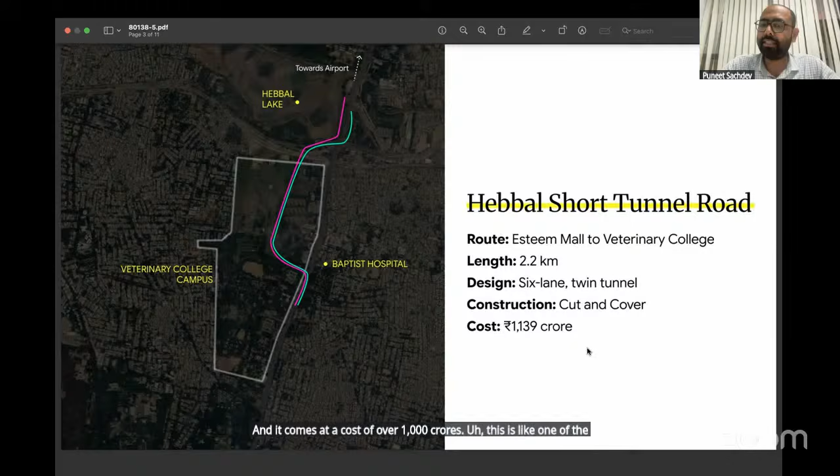And it comes at a cost of over 1,000 crores. This is like one of the most expensive projects in Bangalore. 1,000 crores for just 2.2 kilometers. Yeah. So speaking of the ecology and the green and blue spaces, the GKVK campus, Hebbal Lake, Veterinary College campus, and this IISc campus, they all form this large blue and green land area in North Bangalore.

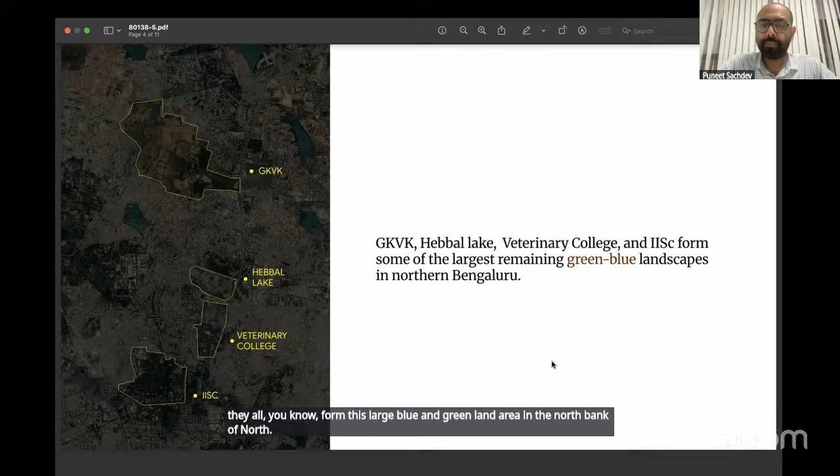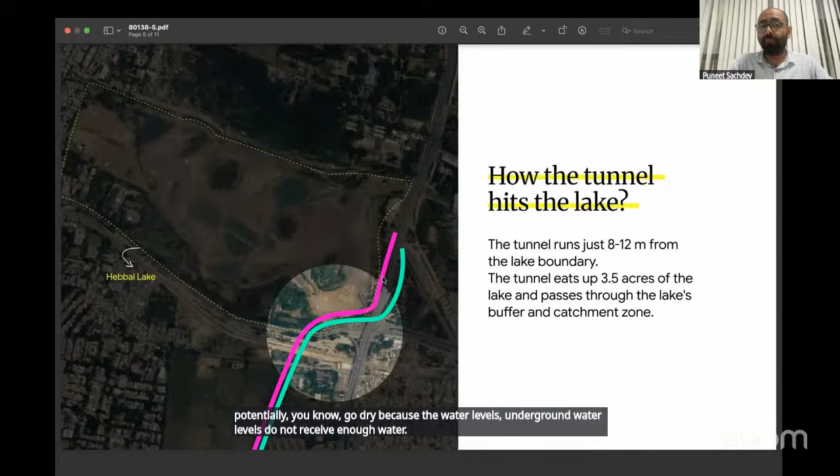So what will happen here is when there is a road, or like a big structure in between, it is going to obstruct between these two regions, which is the lake and this side. So this area could potentially go dry because the underground water levels do not receive enough water. And that would cause flooding on the other sides. Again, all these things will be addressed a little more in detail, just giving you a brief overview here.

Right. And this is something very concerning and disturbing. There is already a red line planned on the same stretch, which will go towards the airport, running across from Mekhri Circle, Hebbal towards the airport. But that has been deprioritized for this particular project. There was also a metro station planned right at the veterinary college campus junction, which has now been dropped to accommodate the exit of this

particular tunnel road. So, when we do a comparison of roads and metro, there's just no comparison. What a metro can do is, as it's mentioned, it can carry lakhs of people every day. But with the tunnel road, it's just going to be a few thousand cars, not people.

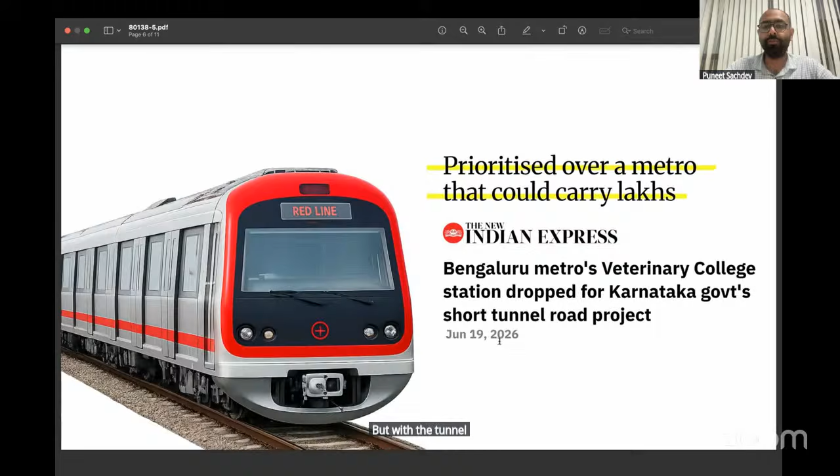This is another interesting fact from their own report. Like it's mentioned here, traffic engineers grade roads from A to F, right? Again, Dr. Ashish Verma is here. He'll be giving much more details about what all of this means. But level A is very free flowing, and F is pretty much like a parking lot.

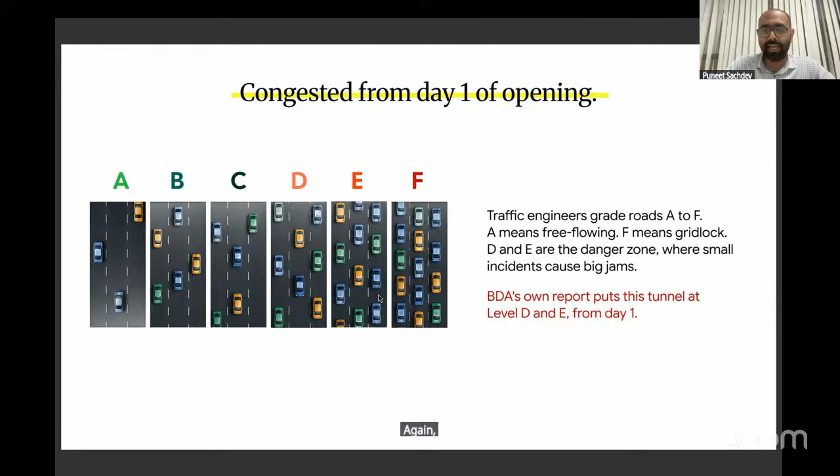And there are many more red flags along with that. The BMLTA review was bypassed. Rishi will be talking much more in detail about the BMLTA. The veterinary college also objected to having a surface level road. So originally it was planned that this road would not be a tunnel road, but it would cut across the veterinary college campus at surface.

So the veterinary college objected, saying that we will not allow a surface level road, but we are okay with the underground road. But what they are doing is still damaging the surface. So again, this is very contradictory.

They raised these objections, but no heed was paid to that. The finance department of Karnataka also raised this concern that this is 10 times more expensive than a normal surface road project. So again, why are they doing this while it is not really a tunnel? What is the need to spend so much money just to dig land and again build walls and build the road? That is something that we need to really think and introspect.

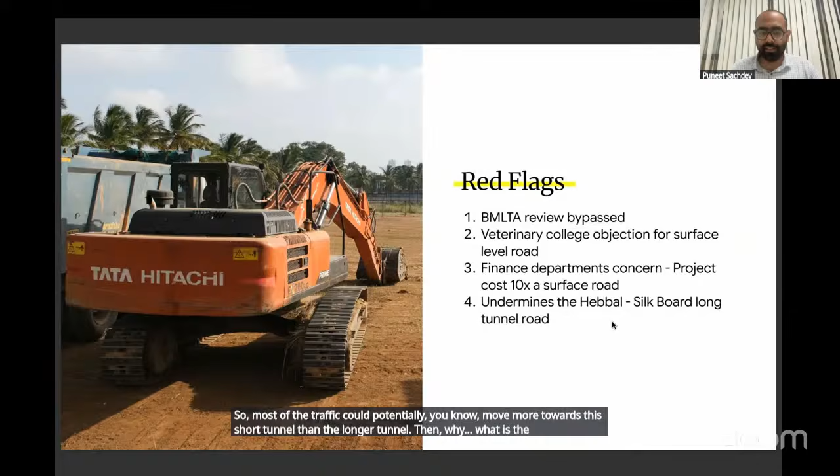And like we discussed, the whole metro and the long tunnel road also. So there is a long tunnel from Hebbal to Silk Board Junction. There is a lot of conflict between these two as well. So the long tunnel is going to be a toll road, while the short tunnel is going to be a free road. So most of the traffic could potentially move more towards this short tunnel than the longer tunnel. Then what is the need of this long tunnel? We'll be going more in detail about all these things.

And then there has been quite a lot of resistance from citizens, from organizations, from anyone who's concerned about this. And there have been some PILs which have been filed in the court. So in the last hearing that we were present, the court directed the government to produce the ecological assessment reports. We were primarily contesting that there are a lot of trees that are going to get cut inside the campus. 3.5 acres of lake is going to be taken for this road. And there has been no real ecological assessment done. The kind of damage that it can do to the whole ecology of that area is not present. So the court acknowledged that fact and they directed the government to produce these reports.

That was by the 20th of August. And on the 24th of August, that is this week, there was supposed to be a hearing which got adjourned. And now the next hearing is on 3rd September, which is going to be an online hearing. So again, why this delay, what is happening, we really don't know. While all this is happening, the ground reality is that the construction is moving at full speed.

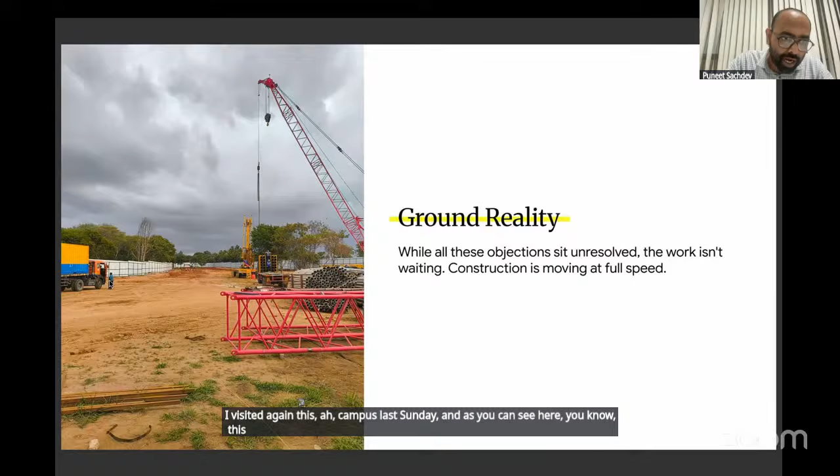I visited this campus again last Sunday, and as you can see here, this entire thing is marked for the road. So this is the boundary for the road. There are huge containers that have come here, which have got something called polymer. So polymer is something that they're going to add after they dig so that the land doesn't collapse. So huge equipment, a lot of investment already there.

I spoke to a couple of engineers there, and they said that they target to finish this casing in 8 months. There is a huge shed which has been set up for the workers who are here to build all of this. So around 2000 workers are going to be living there. And all this has already started while there is so much objection still going on, which is unresolved.

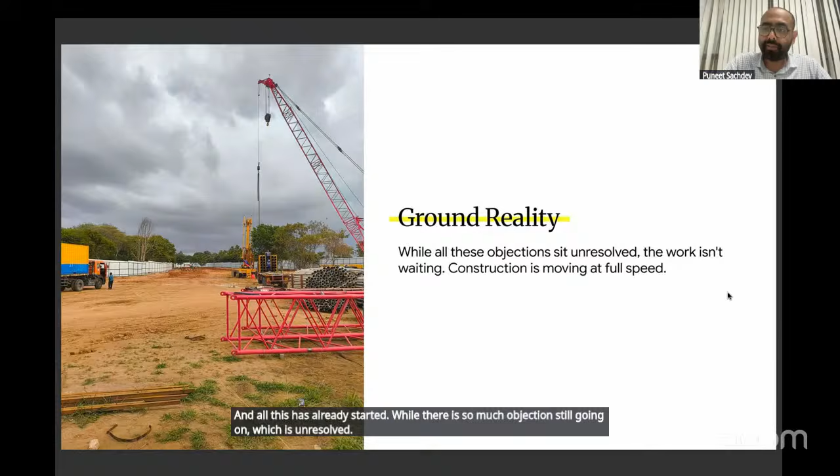And like Vandana also rightly mentioned when we started, it is not just about this particular project, but it is the pattern where such huge projects are being sanctioned without necessary assessments, without consultations from experts, from citizens, nothing. It is just brazen audacity where these different organizations are just going ahead and spending so much of our money on these projects which are not going to help too much. I would not even say too much, they're not going to help at all. So that's all.

I think I will allow Dr. Ashish to go in detail about the specifics and how it will impact the traffic or how it is not going to impact the congestion. So over to you, Dr. Ashish.

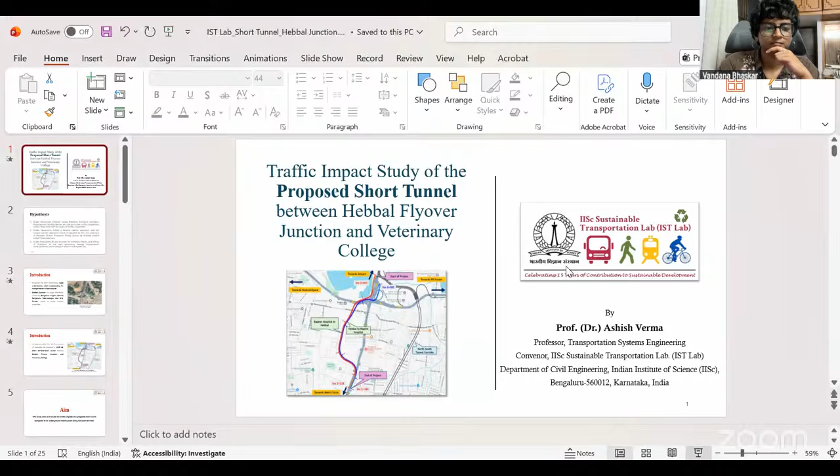Thanks. Vandana, can I go ahead? Go ahead, yeah. I'll just share my screen. Can you confirm if you can see? Yeah, we can see your screen.

Great. So thanks, Puneet, for setting the context quite well. So in this presentation, which is mostly purely technical, we'll look at the whole traffic impact of the proposed short tunnel between Hebbal Flyover Junction and Veterinary College. And this whole premise that this short tunnel will solve some traffic problem is what we are going to investigate and see at the end whether it really does or not. So the idea is to investigate that core purpose, which has been stated by the government of Karnataka, and I remember reading the government notes and justification that this will be a permanent long-term solution.

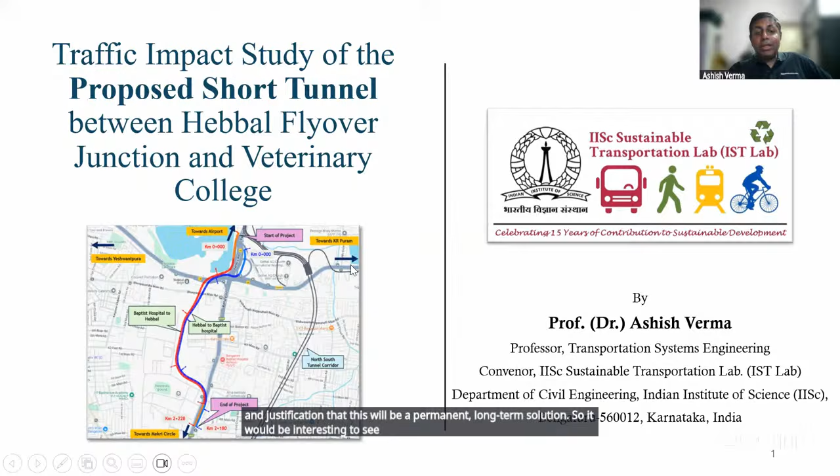So it would be interesting to see what this short tunnel really does in terms of what has been stated. Okay. So I'll start with these three hypotheses. And I remember presenting these three hypotheses in the Sankey Tank flyover public meeting presentation also. Thankfully, we were able to stop that project, which again would have caused a lot of damage to Sankey Tank.

So the first hypothesis is that the grade separators, and I'm categorizing all these, whether it is tunnel roads, flyovers, elevated corridors, underpasses, double decker, etc. All these technically are called grade separators, do not solve the traffic congestion. Rather, they only shift the point of traffic congestion.

Interestingly, we keep seeing this hypothesis coming true in our own experiences within the city, years and years, decades and decades, and other cities also, without really learning from it. And it's amazing to see how the same old wine is being sold in the new bottle every time.

Second hypothesis is grade separators follow a vehicle-centric approach. They focus on vehicle flow and vehicle capacity and not on a people-centric approach, not to maximize the throughput of people and goods, which is the true goal for a mobility system in a city. And which is opposite to the core principle of our National Urban Transport Policy, which clearly says to focus on moving people, not empty cabins and empty vehicles.

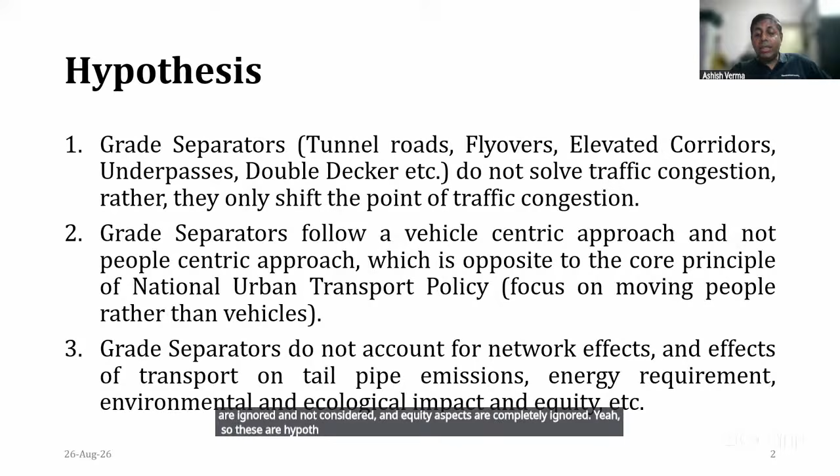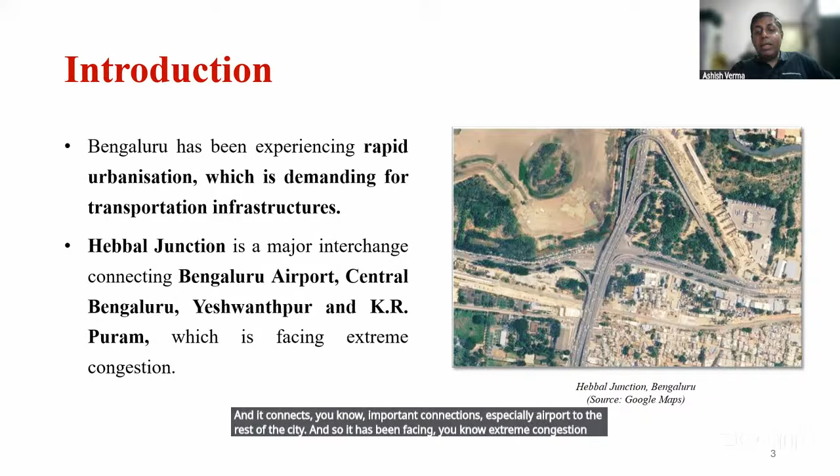Yeah, so these are hypotheses. We'll see how we are able to test or confirm these hypotheses towards the end of the presentation. So obviously the introduction has been done by Puneet, so I'll not get into the details of the project. But yes, Hebbal Junction has been a critical junction, and it is an important connection, especially from the airport to the rest of the city. And so it has been facing extreme congestion, and all kinds of ideas and solutions keep coming up to decongest this Hebbal junction.

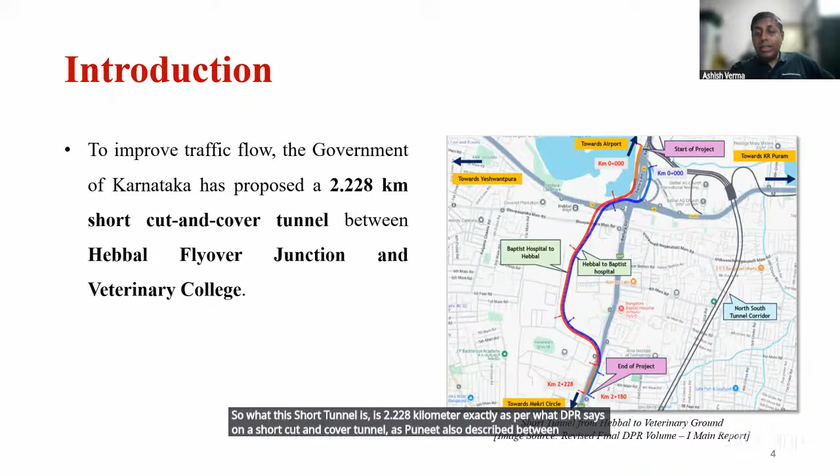So this short tunnel is 2.228 kilometers, exactly as per what the DPR says, a cut and cover tunnel, as Puneet also described, between these 2 points, and you can see the whole layout here. So the aim of our study was to evaluate the traffic impacts of this proposed short tunnel compared to a hypothetical scenario of an underground metro system along the same corridor. To basically give a sense that if this would have been metro, how the space economy changes, how the cost economics changes, how it becomes cost effective, how it becomes space efficient. So to understand these comparisons, we have done some interesting calculations and an interesting way to look at the alternatives.

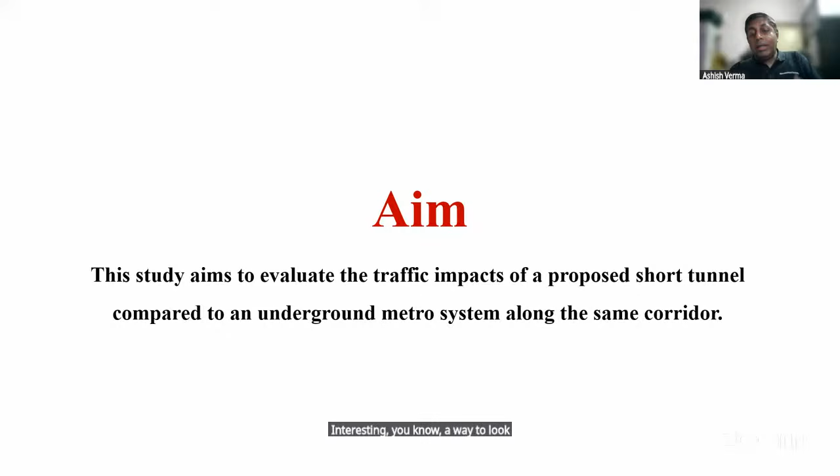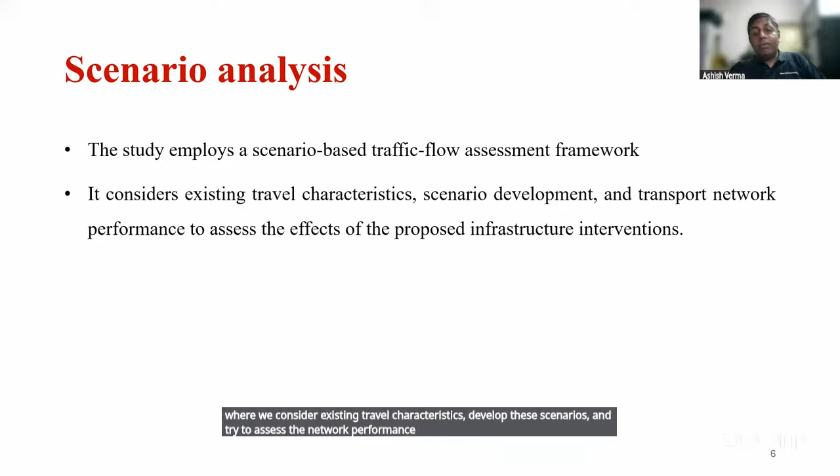So what we have done is we have taken a scenario-based traffic flow assessment where we consider existing travel characteristics, develop these scenarios, and try to assess the network performance for this proposed infrastructure intervention. So these three scenarios we have taken. First is business as usual, that is the existing infrastructure at Hebbal Junction as it is. And then this business as usual current road infrastructure together with this proposed short tunnel that complements the existing road infrastructure.

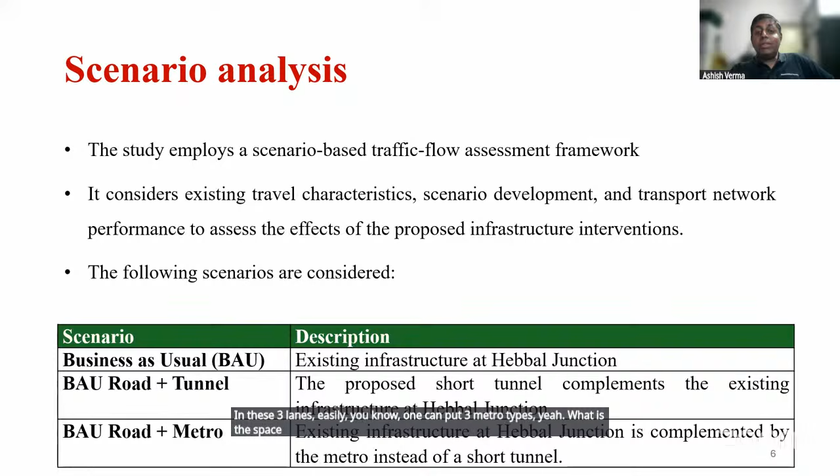And third is an alternative hypothetical scenario, imagining that in this tunnel, instead of normal traffic, metro would have been running. So you would imagine that this is a 3-lane each direction tunnel. That means there are 3 lanes in each direction. So if you imagine 3 metro tracks in these 3 lanes, easily one can put 3 metro tracks here. What is the space dynamics? What is the capacity that you basically bring in? How does that comparison look? So that's the third scenario.

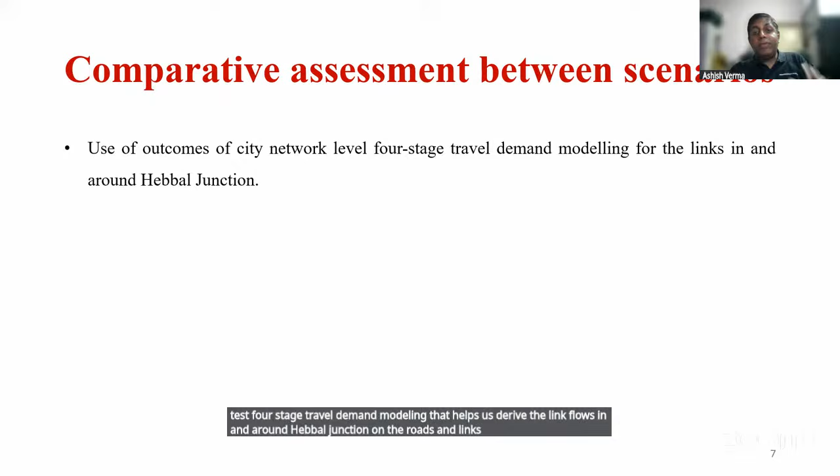So what we have done is we have used the outcomes of our city network-level simulation model that we have developed over time, which we call 4-stage travel demand modeling, that helps us derive the link flows in and around Hebbal Junction on the roads and links for different years and for different scenarios, and helps us understand this whole calculation of volume to capacity ratio and how this would.

Sorry, there is background noise. Somebody can take care.

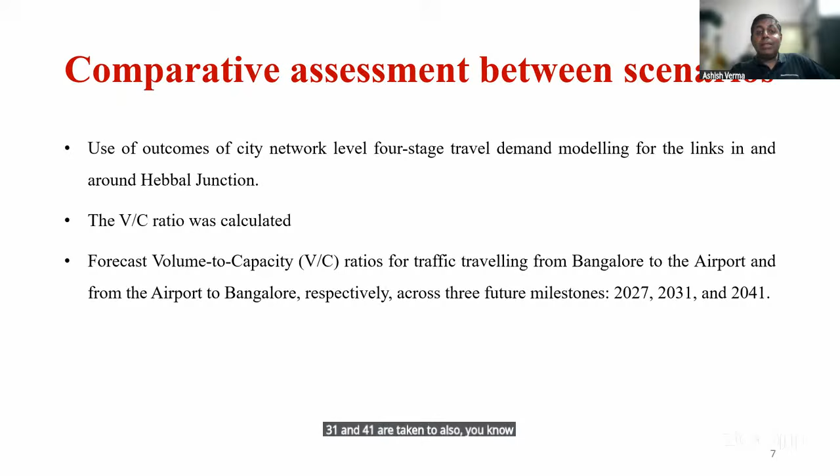To basically help assess this V by C ratio, how it changes in the 3 scenarios. And for 3 years, we have taken 2027, 2031, 2041. 31 and 41 are taken to also make us understand the longevity of these interventions and solutions. And yes, Puneet has already shown this is how one can visualize a V by C ratio.

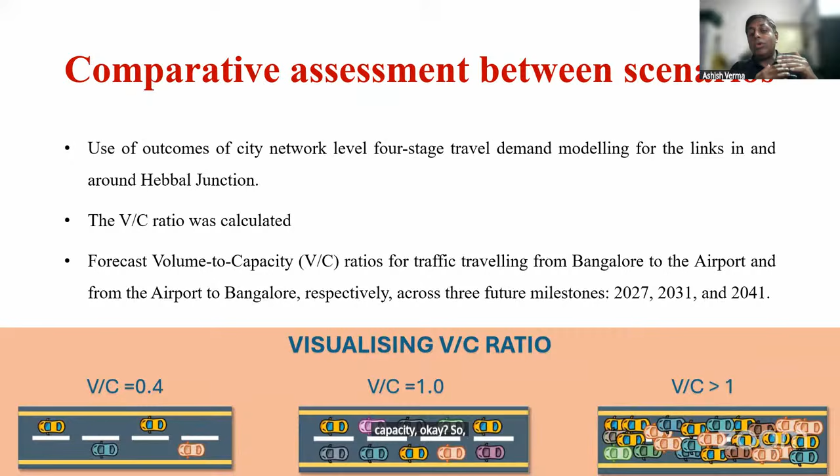If V by C ratio, volume to capacity ratio, is close to 1 or exceeding 1, essentially it helps us understand the gap between the demand and supply of capacity. Okay, so anything close to 1 or beyond 1 is an extremely jammed condition. So let's come directly to the results. So what we have is the peak hour flow direction. This is from city side going to the airport. Let me take the pointer if I can.

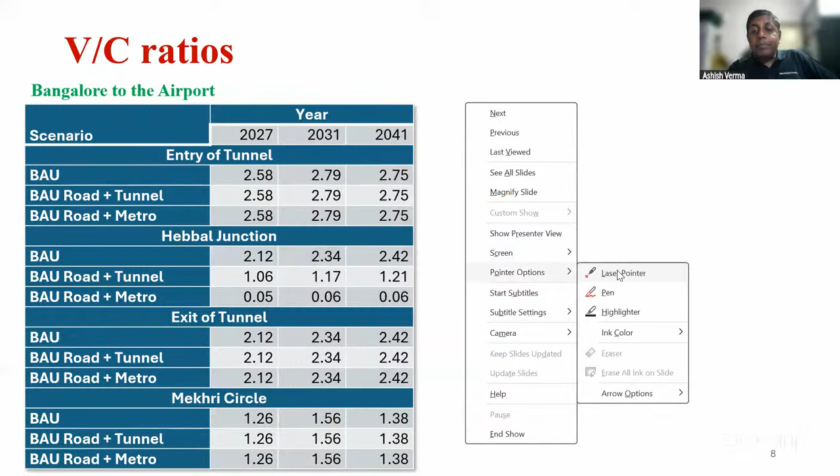So we have these 3 years, 2027, 2031, and 2041, and the locations: the entry of the tunnel, the Hebbal Junction, the exit of the tunnel, and Mekhri Circle. How this V by C ratio looks for each of these 3 scenarios. So in the existing scenario, in the current year, that is next year, your V by C ratio is already 2.58. And as you go further, 2031 and 2041, it's only increasing, 2.79, 2.75.

At the entry of the tunnel, at Hebbal Junction, at the exit of the tunnel in BAU condition, you will see 2.12 and so on. And at Mekhri Circle, again, it's still above 1. And when you add the tunnel as the scenario along with the existing road, the section which goes parallel, you would see a reduction in the V by C ratio, but it's still above 1, or still remains in level of service F category, the worst level of service category. And of course, in 2031, it increases to 1.17 and then 1.21. So forget about longevity, forget about permanent solution. It's just not a solution itself for what we are trying to solve, that is traffic.

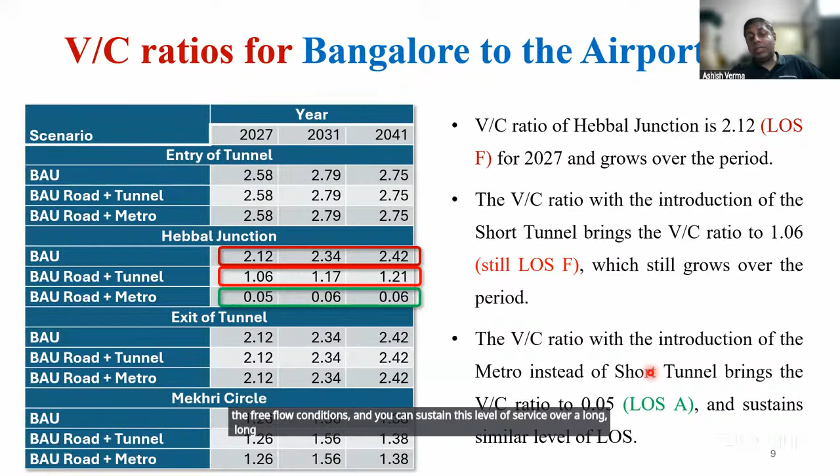At the exit and entry, of course, there will be changes, but to understand that, we need to do a traffic micro simulation. Then only we'll be able to see, and I'll show what happens when 6 lanes suddenly merge into 3 lanes. What you're going to create is classic bottleneck points at both entry and exit of this tunnel. So you would see the V by C of Hebbal Junction at 2.12 and growing over the period. The introduction of the short tunnel brings the ratio to 1.06. It's still level of service F. And with metro, you literally have free flow conditions, and you can sustain this level of service over a long, long time. That's the space economics we are talking about.

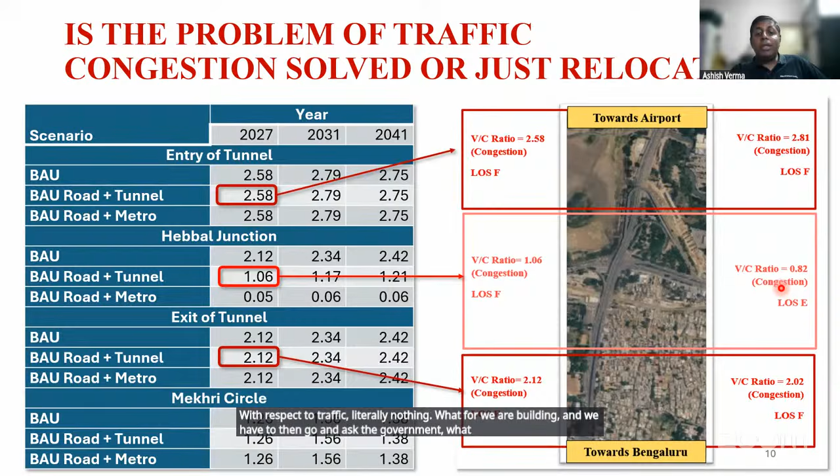So this is how it looks at the different stretches of this whole short tunnel. It remains at level of service F mostly, or at most E. So what is it you're really solving with respect to traffic? Literally nothing. What are we building for? We have to then go and ask the government: what is it you're building for, if it is not helping traffic, and why are we doing this in the name of traffic?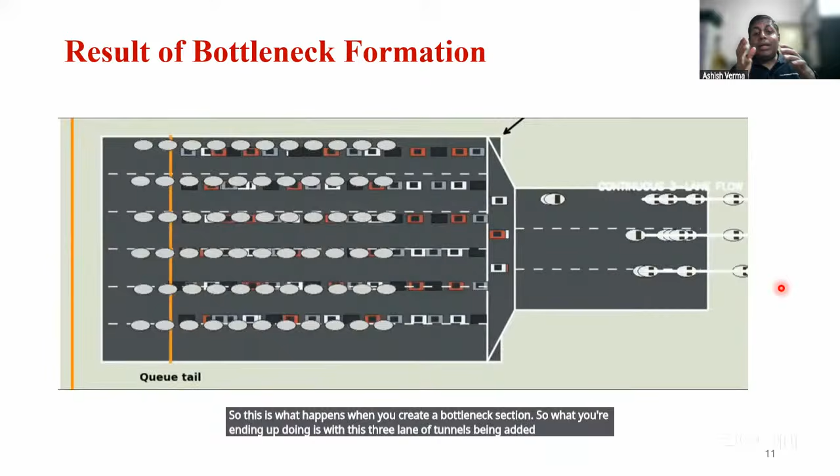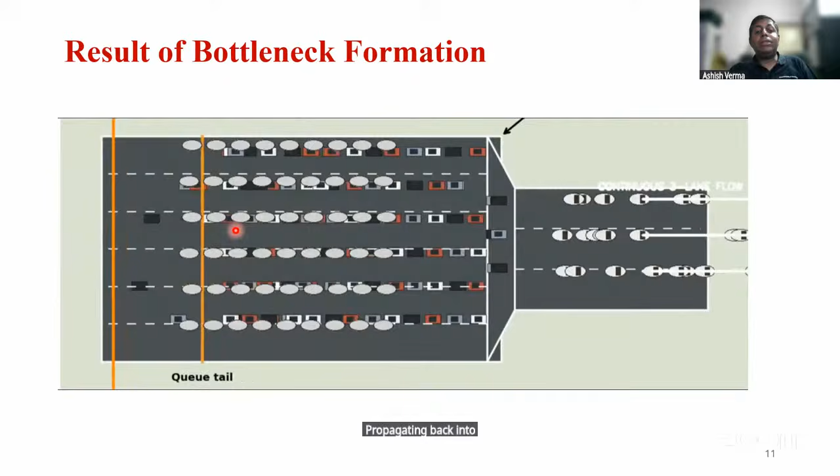So this is what happens when you create a bottleneck section. With these 3-lane tunnels being added, you would create a classic bottleneck where, as vehicles exit or enter, you would see the shock waves of the queue propagating back into those tunnels and into those roads. So the whole spillover effect of this bottleneck will clog and congest the traffic inside the tunnel itself.

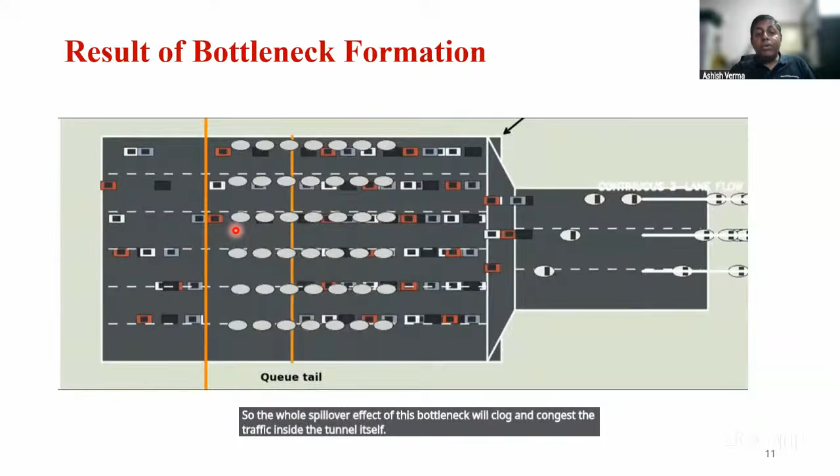You would see a classic live example of this in this video from one of the cities of China, where almost 20-25 lanes are merging into 5 lanes. This is the kind of bottleneck you create when you have these differences, and the spillover effect onto the queue that forms takes a long, long time to dissipate. Nowadays people keep posting on social media: I went past Hebbal flyover, and by the time I reached the Windsor Manor Junction, it was already 70 minutes. Once this tunnel is built, it would probably take 90 minutes.

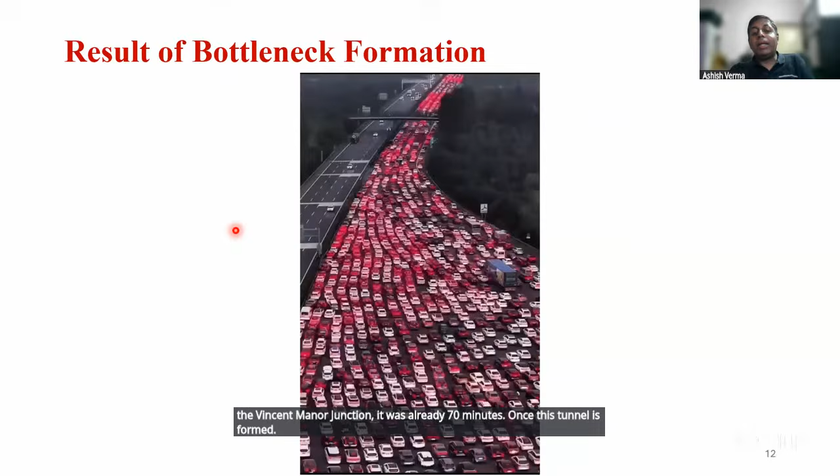But we looked at the DPR values also. They show this figure for the business as usual V by C ratio. But what we have realized is that they have actually underestimated the corridor capacities by assuming wrong capacity values in each direction, where the actual figures are this much, which basically inflates the business as usual V by C ratio, trying to highlight an urgent need to expand capacity.

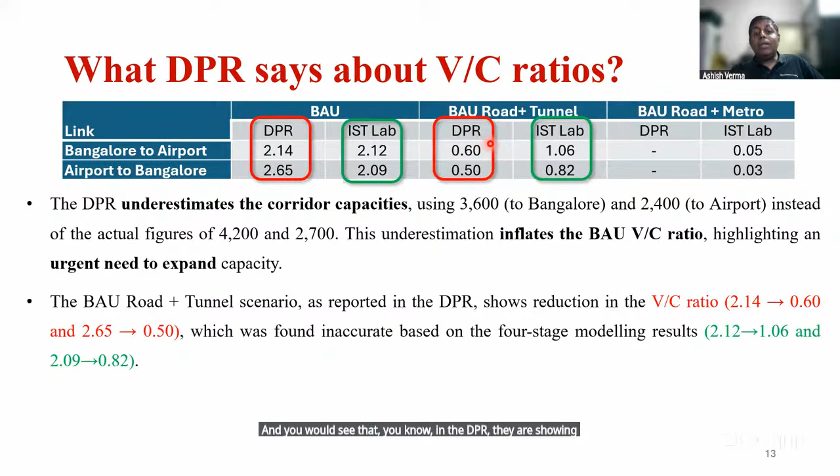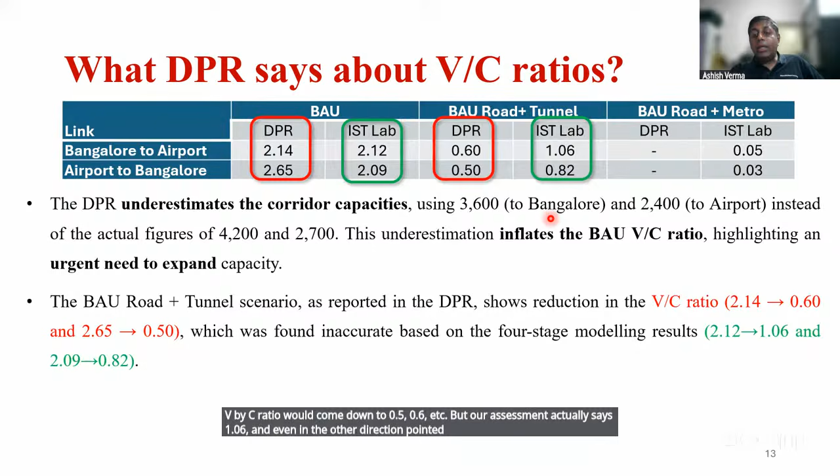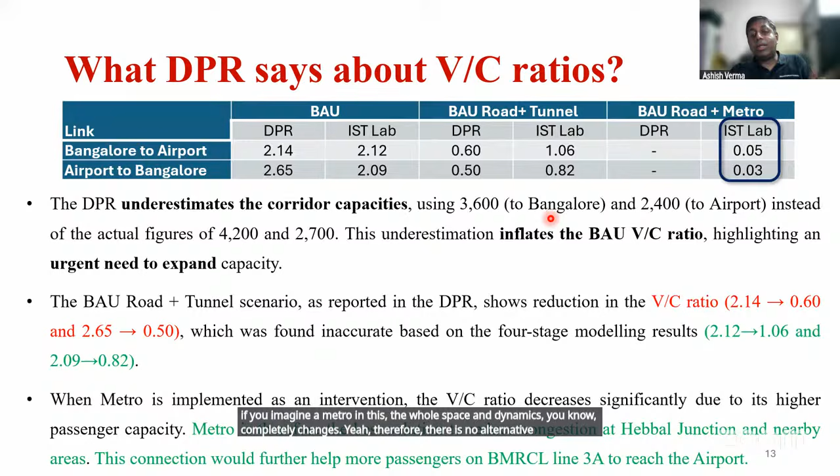And you would see that in the DPR they are showing that with the tunnel the V by C ratio would come down to 0.5, 0.6, etc. But our assessment actually says 1.06, and even in the other direction 0.82. So there is a clear difference between what they have put in the report and what our estimations say. And of course, as I mentioned, if you imagine a metro in this, the whole space dynamics completely changes. Therefore, there is no alternative long-term solution other than an MRTS system like metro or urban rail.

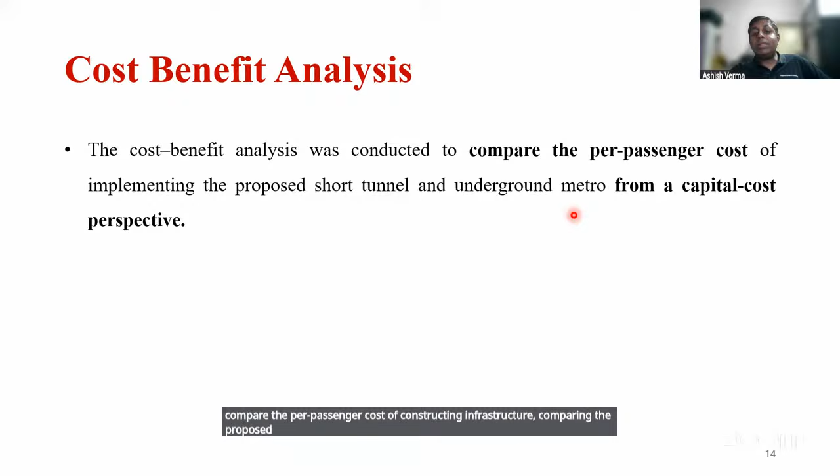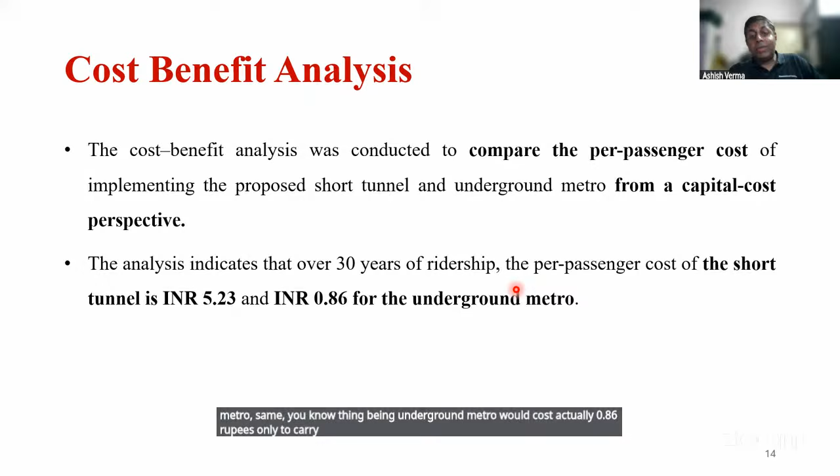Now, coming to the cost-benefit analysis, we have tried to compare the per passenger capital cost of constructing the infrastructure, the proposed short tunnel road versus an underground metro. If we take the total passengers that will be using the facility over 30 years and calculate how much it costs to transport one passenger over that 30-year period, a short tunnel costs rupees 5.23 per passenger, whereas an underground metro would cost only 0.86 rupees. That's the difference in cost efficiency you bring with a public transport system.

We have even calculated this in terms of throughput capacity, passengers per hour per direction: 13.74 lakh rupees per PPHPD for a short tunnel versus just 2.26 lakh rupees per PPHPD. So what this essentially tells us is that the cost to carry one passenger by short tunnel is almost 6.12 times more than an underground metro. I'll repeat: the cost to carry one passenger by short tunnel is 6.12 times more than the underground metro. What a brazen, colossal waste of public money, when you can do it much more cost effectively.

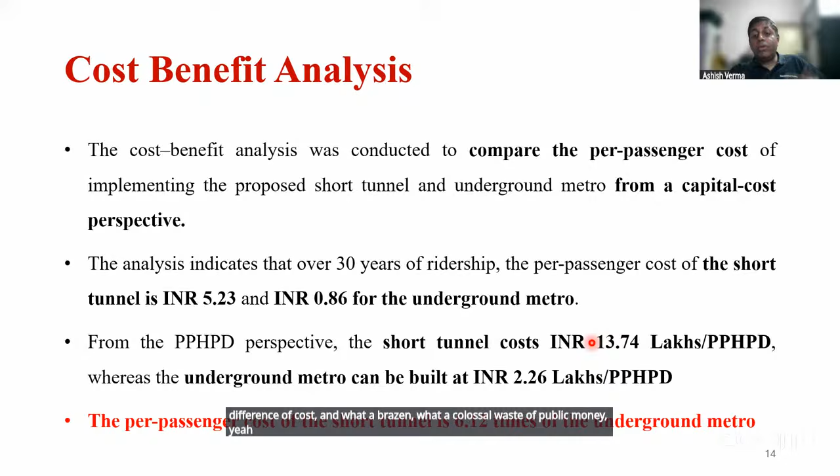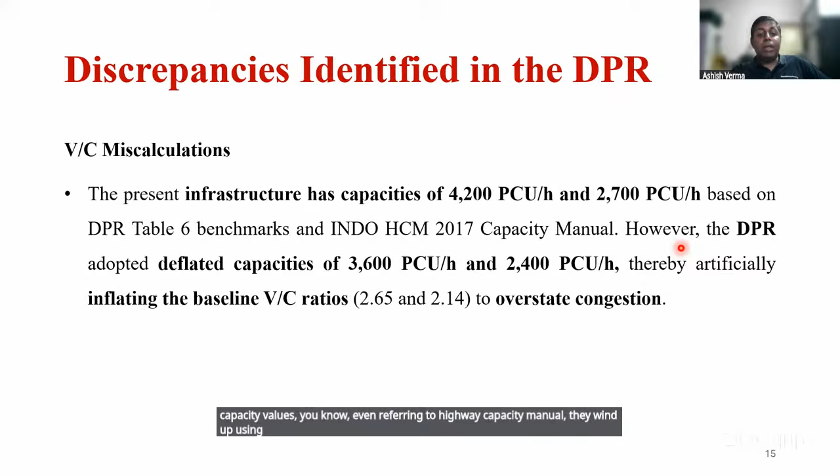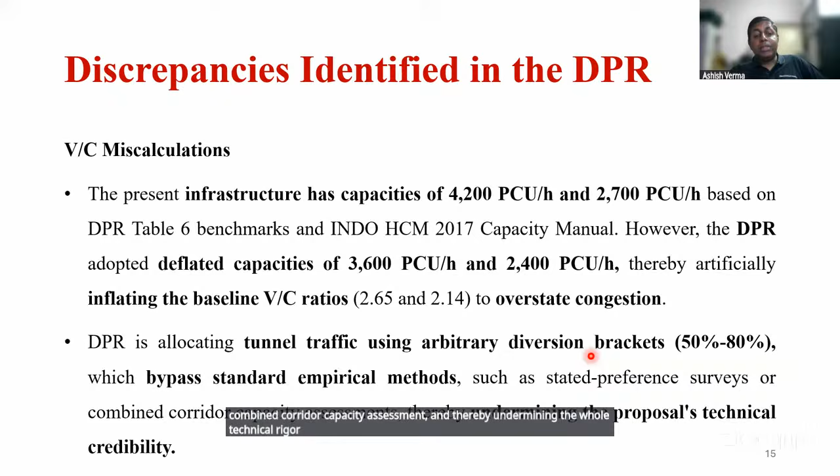And we tried to identify some of these discrepancies: as I said, use of wrong capacity values; even referring to the Highway Capacity Manual, they have ended up using wrong capacity values to inflate the baseline V by C ratio. Also, the DPR allocates traffic to the tunnel road with very arbitrary diversion brackets between 50% and 80%. Simple hypothetical assumptions, bypassing standard empirical methods like stated preference surveys or combined corridor capacity assessment, thereby undermining the technical rigor required in such feasibility analyses and DPRs. Also, as some of you would have noticed, there would be a probable capacity reduction due to speed.

The sharp turn in the short tunnel: actually, the DPR itself says that the design speed reduces inside the tunnel itself on this sharp 60-meter radius curve from 60 kmph to 40 kmph. What this will do is reduce the capacity substantially and cause queue formation inside the tunnel. And along with that, it could also pose a potential hazard for accidents, because if people don't follow the speed limit, there are all chances that these kinds of sharp curves can lead to accidents. So these are also

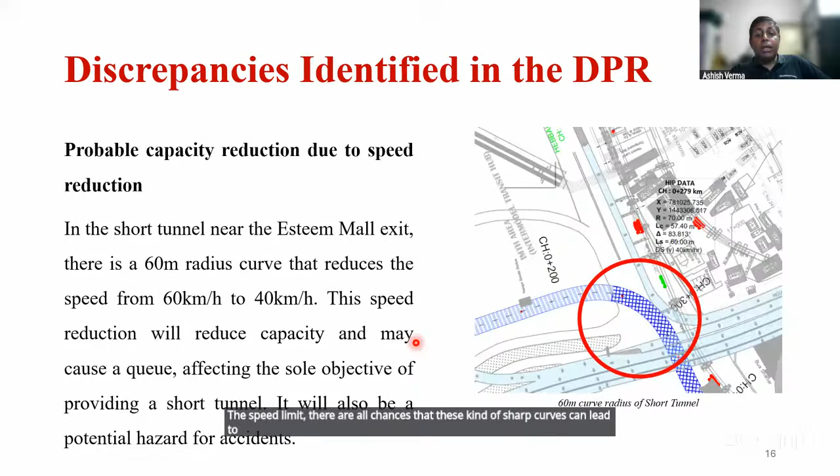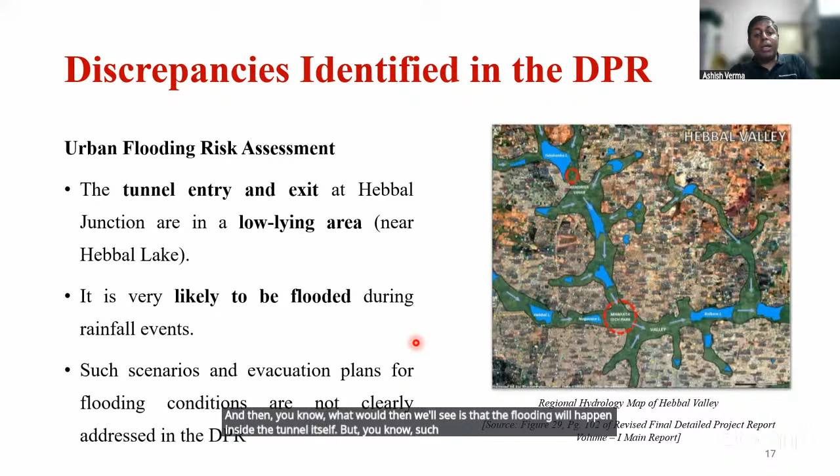possible issues. And as Puneet also pointed out, the tunnel entry-exit at Hebbal Junction are in the low-lying area near Hebbal Lake, and it's likely to get flooded during rainfall events. And then what we'll see is that the flooding will happen inside the tunnel itself. But such scenarios and evacuation plans for those kinds of flooding situations are completely absent and not addressed in the DPR.

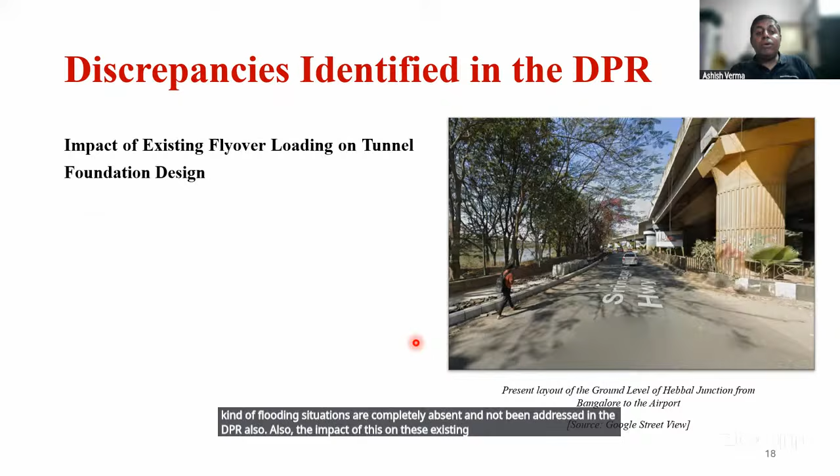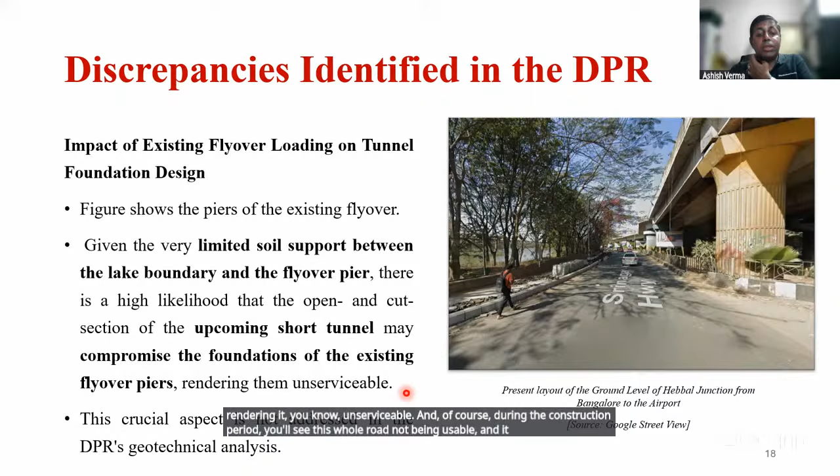Also, the impact of the existing flyover loading on the tunnel foundation, because they are going for this whole cut and cover method. There will be limited soil support between the lake boundary and the flyover pier, and there is high likelihood that the open cut section of this short tunnel may compromise the foundation of the existing piers, rendering it unserviceable. And of course, during the construction period, you will see this whole road not being usable, and it will create much more chaos. And this aspect has also not been looked into from a geotechnical point of view.

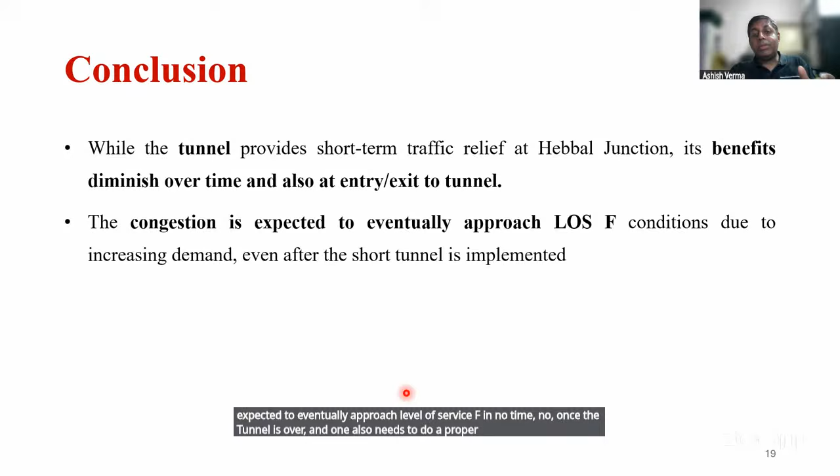So to conclude, while the tunnel provides very short and little relief, it still remains in a heavily congested state, and therefore its value diminishes very quickly, almost immediately, especially at the entry-exit points of the tunnel. The congestion is expected to eventually approach level of service F in no time once the tunnel road is over. And one also needs to do proper micro simulation modeling to see how much actual queue length formation would happen inside the tunnel due to the bottlenecks at entry and exit. As I said, this sudden capacity change is going to result in queue formation.

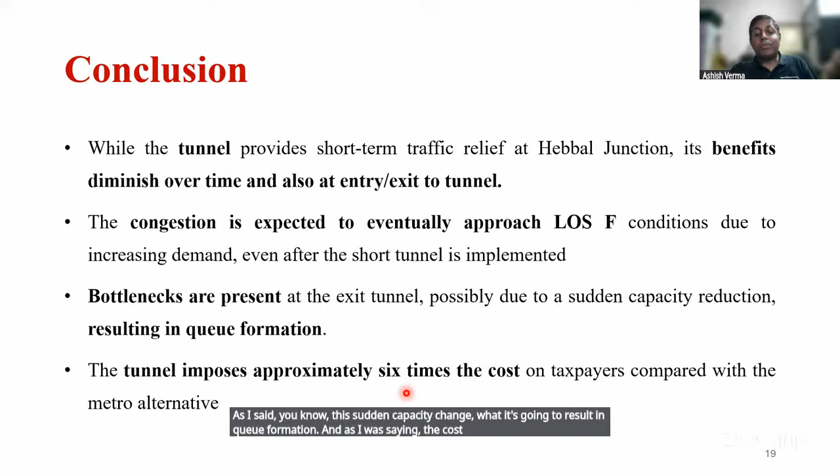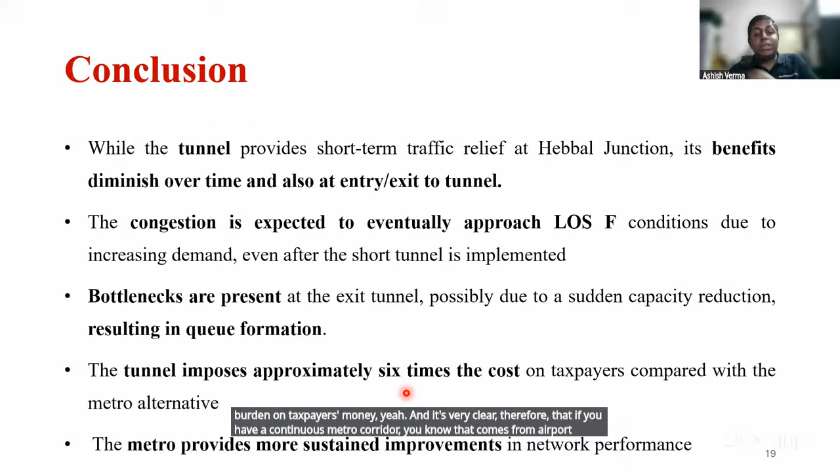And as I was saying, the cost dynamics: the tunnel imposes approximately 6 times the cost that otherwise would have been required to carry one passenger, and this whole burden is on taxpayers' money. And it's very clear, therefore, that if you have a continuous metro corridor that comes from the airport and goes towards the city center, that's really the long-term and permanent solution, nothing else. And it will have substantial impact over the network also.

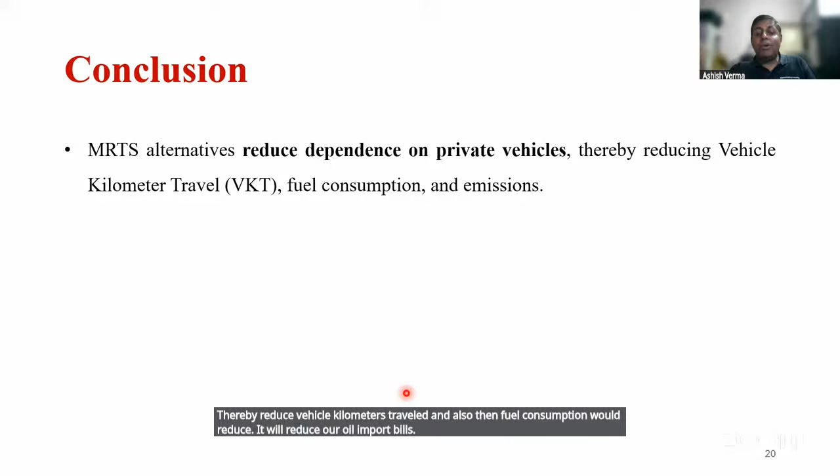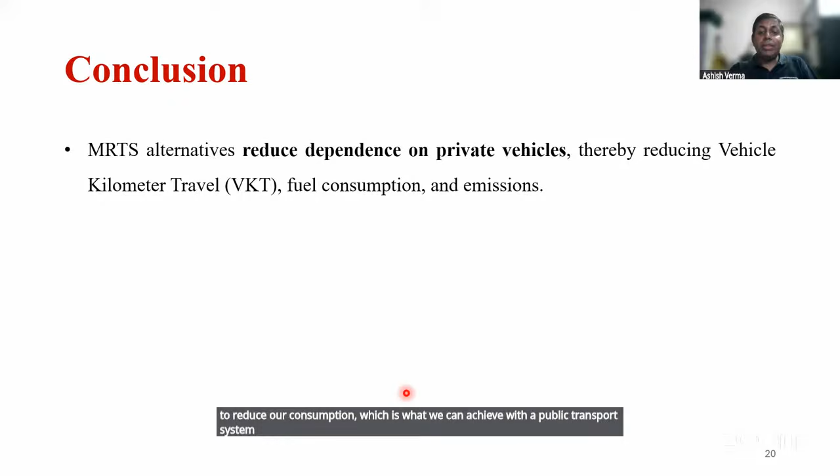So obviously having an MRTS alternative would reduce dependence on private vehicles, thereby reduce vehicle kilometers traveled, and then fuel consumption would reduce. It will reduce our oil import bills, for which the government is doing all kinds of ethanol blending and so on. The important thing is to reduce our consumption, which we can achieve with a public transport system and not by creating this road infrastructure. And of course, tailpipe emissions will also come down when the VKT goes down. So MRTS offers a much more economically efficient and sustainable long-term option. It's also going to improve the environment by reducing emissions, and therefore will also contribute to quality of life.

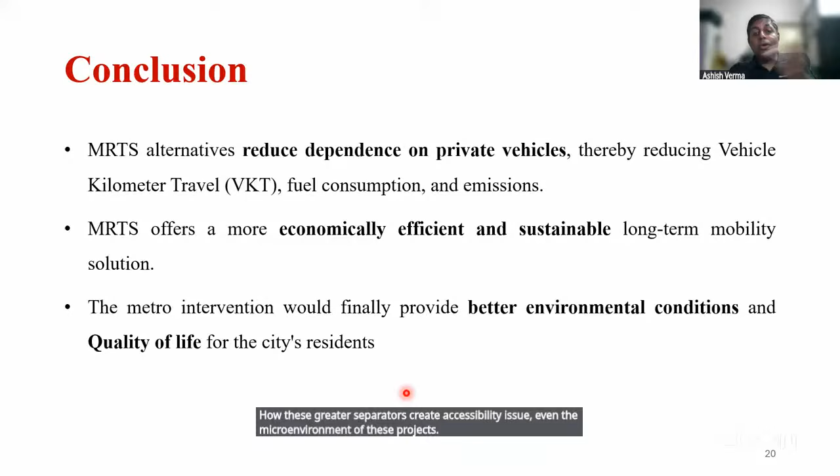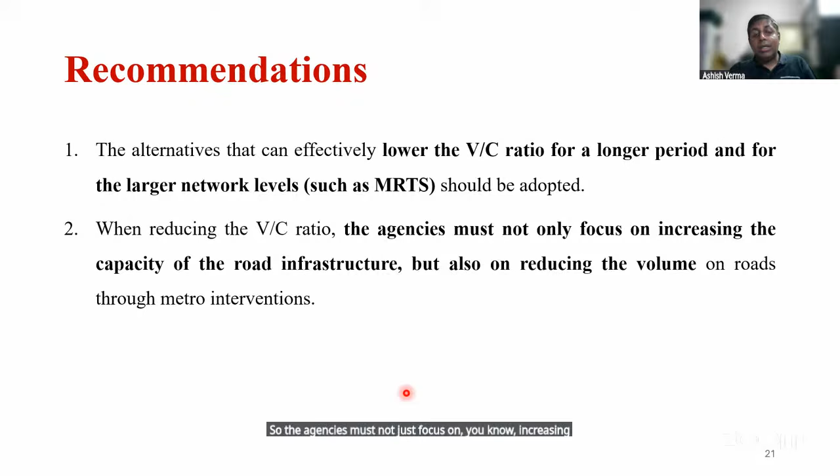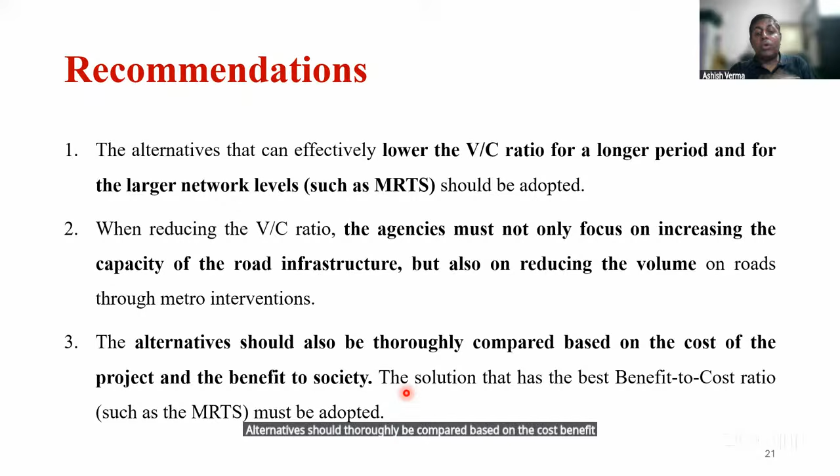We also should realize how these grade separators create accessibility issues, even the microenvironment of these projects, and how much we can avoid all these things and improve the quality of life of citizens. So in terms of recommendations, it's clearly a case for an MRTS system as an alternative, a permanent and long-term solution. So the agencies must not just focus on increasing road infrastructure capacity, creating more bottlenecks and shifting the points of congestion. Alternatives should be thoroughly compared based on cost benefit analysis and overall societal benefits, and then come to conclusions. Metro is far more efficient, both in terms of space and in terms of cost.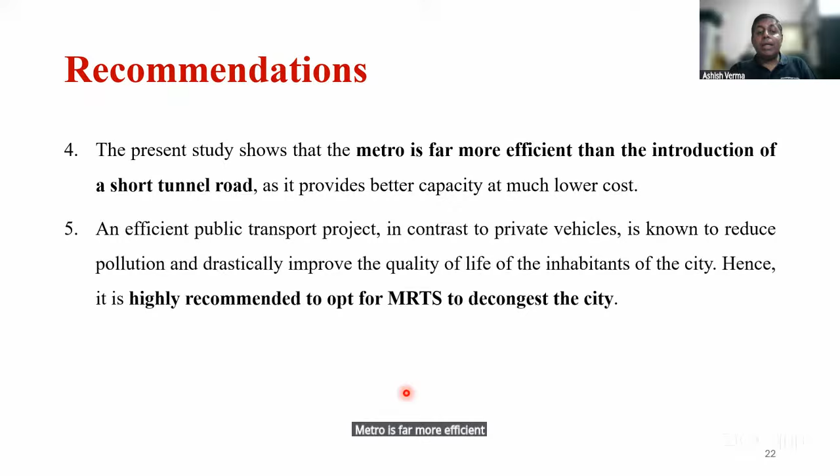So before I end, I just wish to acknowledge all my research scholars who have worked day and night for the last week or so on this whole analysis and preparing this report. And thanks to all of them for doing a meticulous job.

I must also inform that today a delegation met the Honorable Governor of Karnataka at the Governor's house in the morning. And two important points were discussed. One was about this tunnel road project, and I could formally submit this report to the Honorable Governor.

And along with that, the whole issue of amendment in the Park Act and the impact of that on the park spaces and green spaces was also discussed, and a memorandum was submitted. So we are trying our best to see how we can stop this madness.

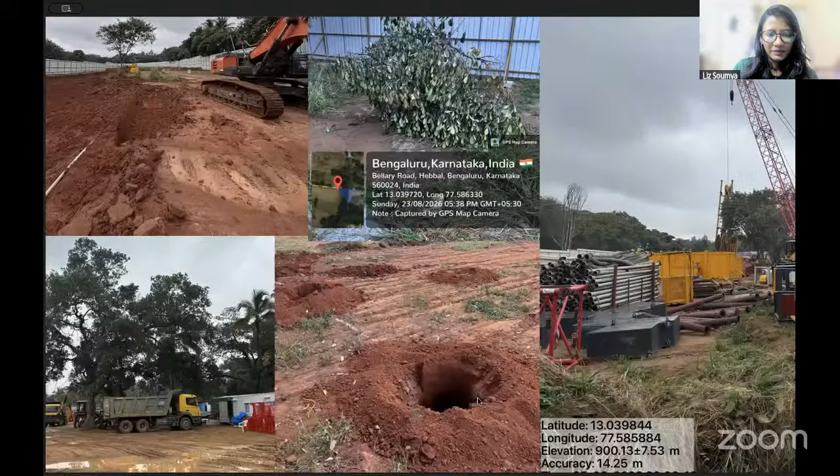Sorry, just give me a moment. Just 1 second. Meanwhile, if any of you have any questions, please put it in the chat for the Zoom participants and even for those on YouTube Live. Do let us know, Elizabeth. We can also share it while you speak. Yeah, I think my computer is just hanging. So if you want to share, I'll just stop. Sure, one of us can. Yeah, I can do it. Just give me a second. Can you see it? Yes. Thanks. So yeah, sorry about that. The next slide is about the Hebbal Lake. Okay. Vandana, you can go forward. Just 1 second. Can you see it now, Elizabeth? Yeah, I can see it.

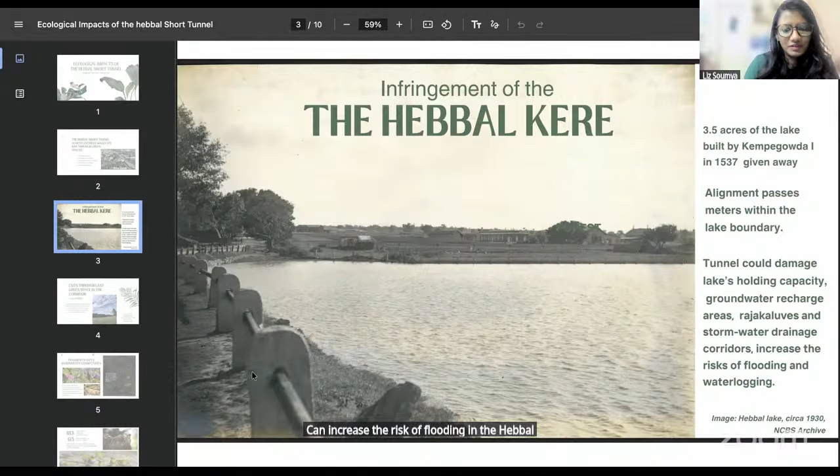And you can imagine the hydrological negative impacts it will have on the area. So it could affect the lake's holding capacity and, of course, the groundwater recharge and Rajakaluve stormwater drain corridors. And it also can increase the risk of flooding in the Hebbal, Nagavara Valley and around. Yeah. The next slide.

So apart from the lake, the longest stretch of this tunnel is actually through one of the last green spaces in the Hebbal corridor, which is the UAS Hebbal campus. This campus started in 1899 as an agricultural research station. And one of the reasons it has been able to stay green is because it's had institutional immunity, even though everything around this campus is extremely urbanized and concretized. So somehow this was safe.

And it also has different pockets of habitats like woodland, grassland, and it has mature trees. So it makes it a very diverse habitat. Yeah, next slide.

So if you see the map, you will see that the veterinary college is a green island, and it's in a corridor which also has the Indian Institute of Science and then Hebbal Lake, and further to the north you have GKVK. So this is actually a very important green corridor for urban wildlife in North Bangalore. And this tunnel actually fragments this.

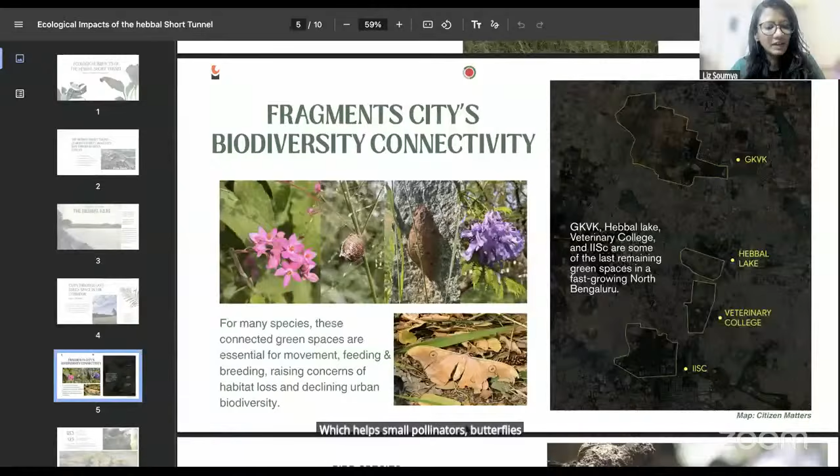And these areas are also a place for food, for nesting, for movement of a lot of wildlife. And because of the agricultural university, it's not as managed like a public park, like a BBMP park or even Cubbon. So it actually has a lot of diverse vegetation, which helps small pollinators, butterflies, and other insects as well. The next slide.

So even though the tunnel is only 2.2 kilometers, it's really surprising that there is such an enormous tree count that we are going to lose. It demonstrates that there's been no environmental assessment or thought given to this project. When we walked along the route, we found more than 1,450 trees that are marked for the vegetation survey. And these trees are of at least 60 different species, including a lot of native species, avenue trees, fruit trees.

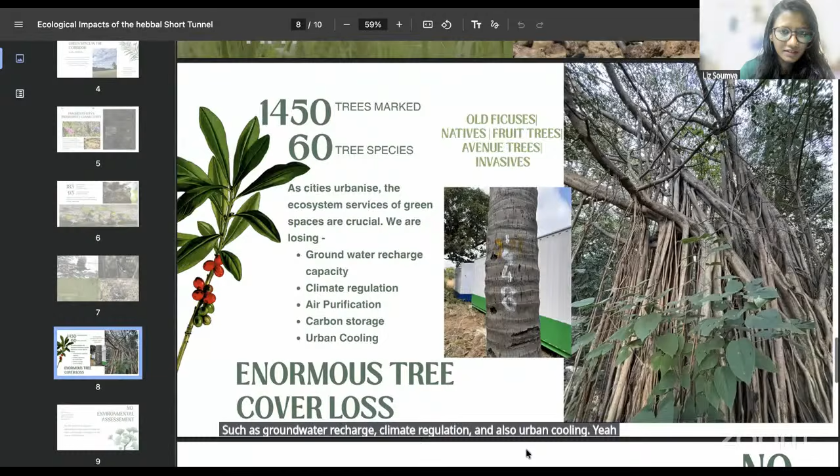So I think I already mentioned that in spite of the fact that this tunnel is passing almost entirely through environmentally sensitive areas, there is no environmental assessment that has been made available. And in the DPR, there's 75 lakhs that has been assigned for environmental assessment.

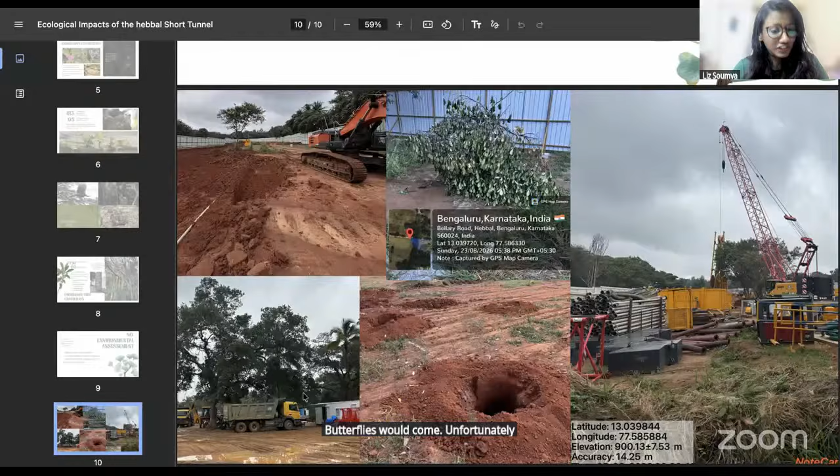And the last slide, unfortunately, it's very depressing. But this is the situation of the grasslands and the veterinary college right now, where all the birds and butterflies would come. Unfortunately, the work is continuing in spite of it being in court. So that's pretty much it. Thank you.

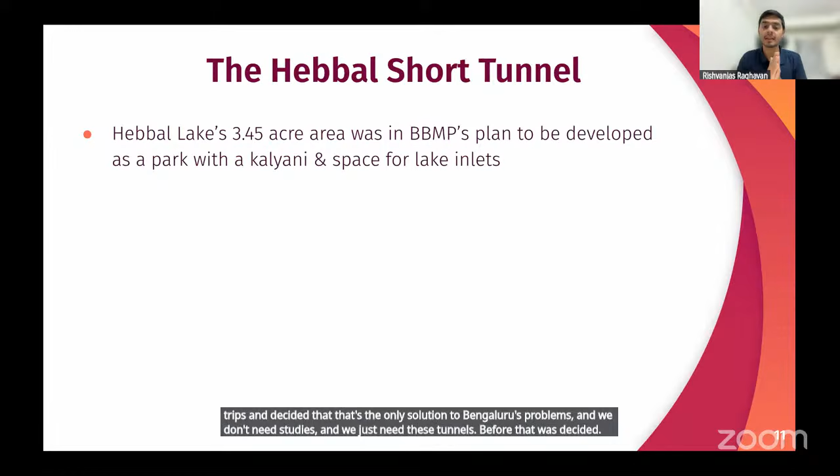Before the chief minister dreamed of tunnels, or rather saw them on his international trips and decided that that's the only solution to Bengaluru's problems and we don't need studies, we just need these tunnels. Before that was decided, this 3.5-acre area of Hebbal Lake, which has now been given away, was already in BBMP's plan to be developed as a park. It had a Kalyani, it was a park. What's important is not what's on the surface of those 3.5 acres. Maybe that is also important, but actually what's under.

This is a very important region where it is an inlet for the Hebbal Lake itself. So about 1/3 of inlets of Hebbal Lake actually come from this area. So it was very important to preserve this area. So the plan was, let's make way for the inlets and let's make it a park. This is there in BBMP's own documents and master plan if you look at it.

And then what happened was the long tunnel was planned as a pet project. No studies, no research. We want to do it. They're doing it everywhere. I want my stamp on this project, so I am going to do it. A decision was taken to do the long tunnel, and then everything else comes later. 2 consultants were paid 15 crores just to copy paste some studies, and don't even get me started on that, because that's the long tunnel and the planning about all of that.

We leave that aside. And then they realized that it's not going to be easy to pass this long tunnel and get it through, and it's probably going to take years. If they are saying it's going to take 5 years, then just think about how long it took us to make the Ejipura flyover, if I can say that it's done. So imagine what we will do for an 18-kilometer long tunnel. So they realized that it's not happening very soon. So the short tunnel was proposed as a temporary fix.

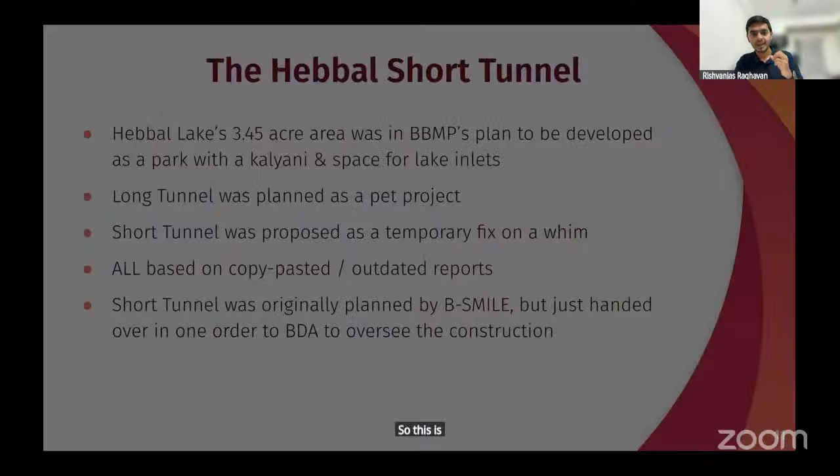And the BMLTA, which was supposed to discuss and evaluate projects like these, all the research that we have, who's supposed to consider and make a decision? This BMLTA, right? It was passed in 2023. However, rules which were supposed to give the act some teeth were not operationalized until very recently, until 2026,

which means that the act saying that yes, there is a body like this, it's representative, all these mass projects should come through this body. So it's passed in 2023, but the rules saying that so and so members should be in the meeting, this is how the meeting should happen, all of that was not operationalized. So basically it was just sitting in a flux for 3 years. And then finally they did operationalize these rules.

But just about a month or even few weeks before the rules were operationalized, all these big projects, elevated corridors, tunnels, all of them were just getting a speedy approval. So technically this was passed in 2023. The law says that anything after this has to go through the democratic due process. But all of these projects were approved. And then the rules were suddenly operationalized.

A draft was put out for suggestions, all of that. We gave suggestions, protested against a particular clause. Nothing changed. The final rule came into effect. And in the final rule, there's this interesting rule 24, which says that yes, BMLTA was passed in 2023, but until the point that we operationalized it with the rules, any projects planned before this are just deemed to be approved.